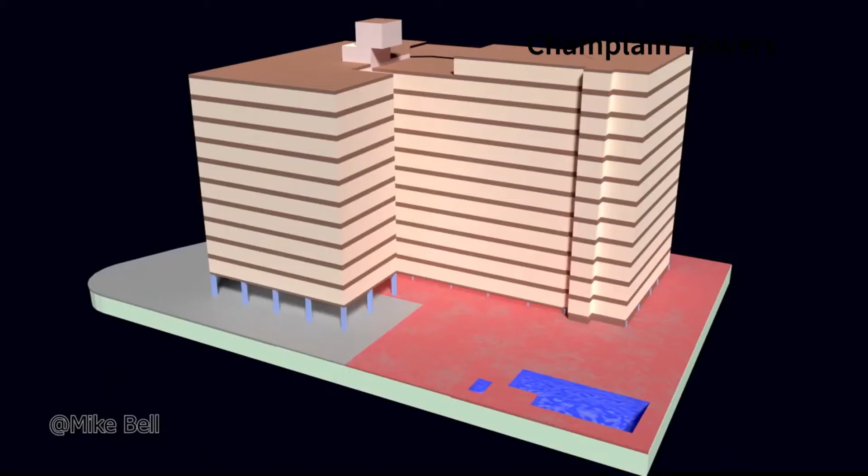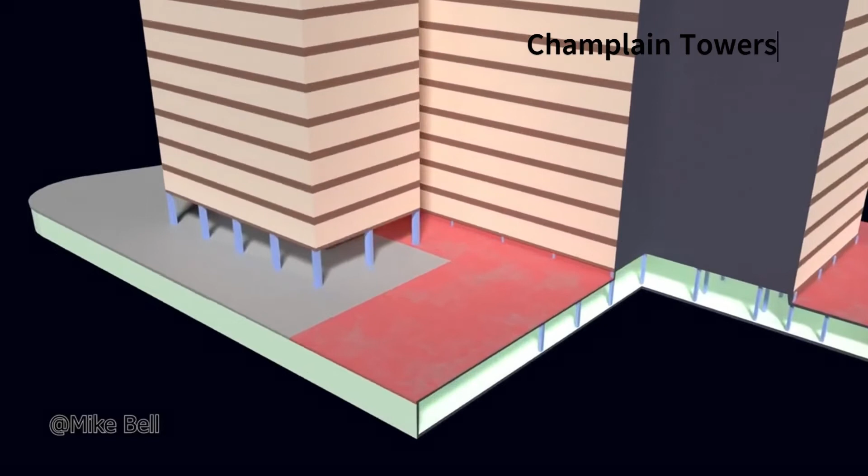According to a news report, in 2018, an engineering firm performed an inspection of the building and issued a report that noted that Champlain Tower's pool deck was flat and not sloped. Now, the question is, what happens if the pool deck is flat? Well, a sloped deck allows water to drain properly, whereas a flat deck can lead to water ponding. And water ponding leads to water seepage and damages the underlying concrete. Also, waterproofing below the pool deck was beyond its useful life.

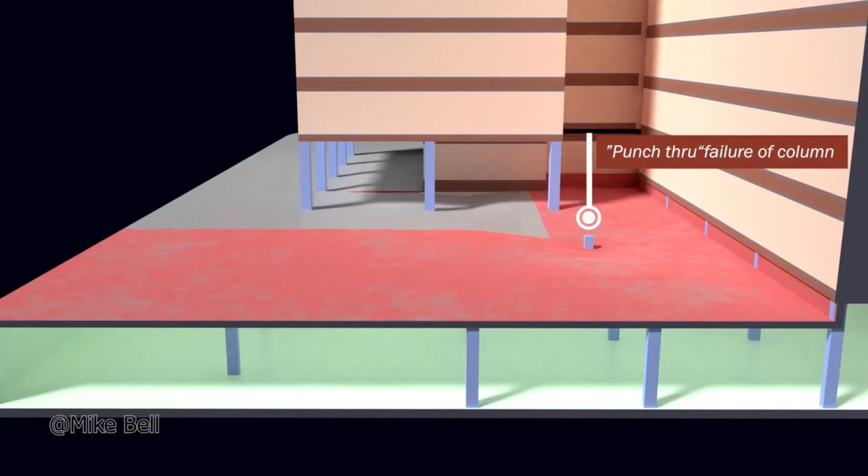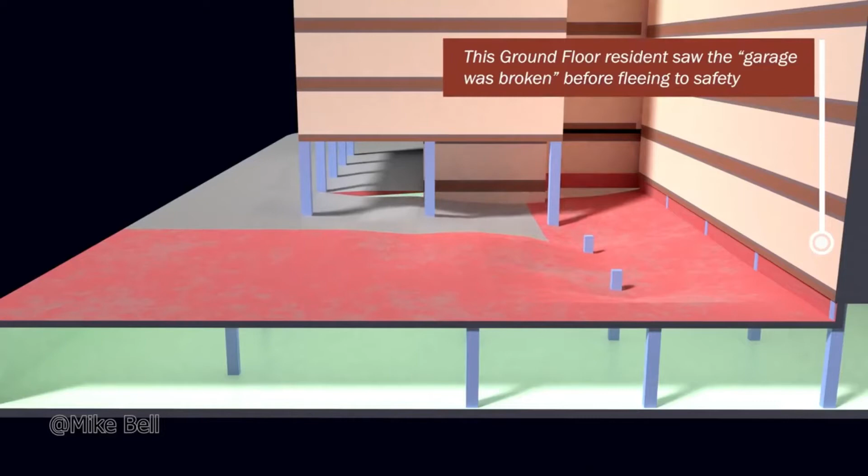So the building had major structural damage to the concrete slab below the pool deck, and there were signs of corrosion, spalling, cracking of the concrete columns and beams in the underground garage. Now, by the looks of it, you would guess the building actually survived the test of time many years and faced hurricanes like Irma, Wilma, Irene. But guess what? The Surfside building had design flaws, engineering flaws.

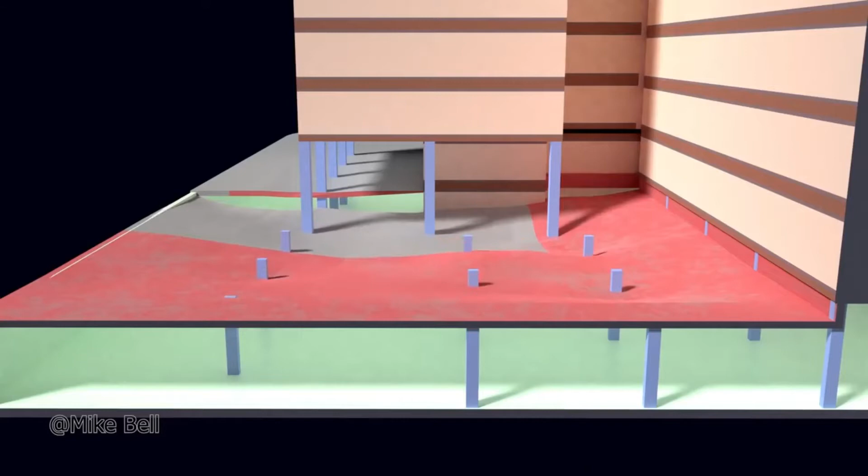Building plans specified structural columns that were too narrow to accommodate enough rebars, which also means the contractor had to choose between cramming extra steel into too small columns, which can create air pockets that lead to accelerated corrosion, or the other option was to develop a poor slab to column connection. Secondly, the columns were barely designed with enough strength to support a pool party. Coupled with standing water over time, this deck was overloaded for decades.

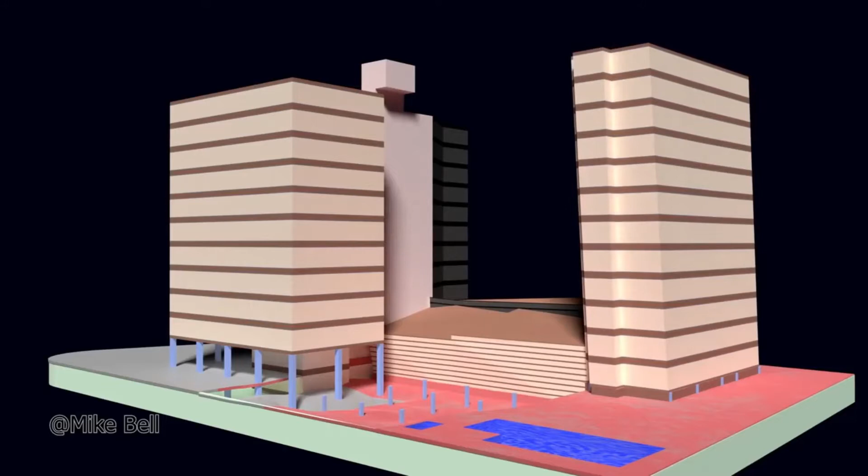Last but not the least, to make the situation worse, the condo association also delayed the repairs of the issues that were identified in the engineering reports because of infighting among the members of the association. Well, to fix these problems, ladies and gentlemen, the government came out with the SB 4D building safety law. Unfortunately, it took a tragedy like Surfside to pass this law.

110 yeas, 0 nays, Mr. Speaker. Bill passes. With a unanimous vote in the Florida House, this is real policy with real change affecting real families. Lawmakers like State Rep Jackie Toledo from Tampa say they're hoping to prevent another tragedy similar to the catastrophic condo collapse in Surfside last summer.

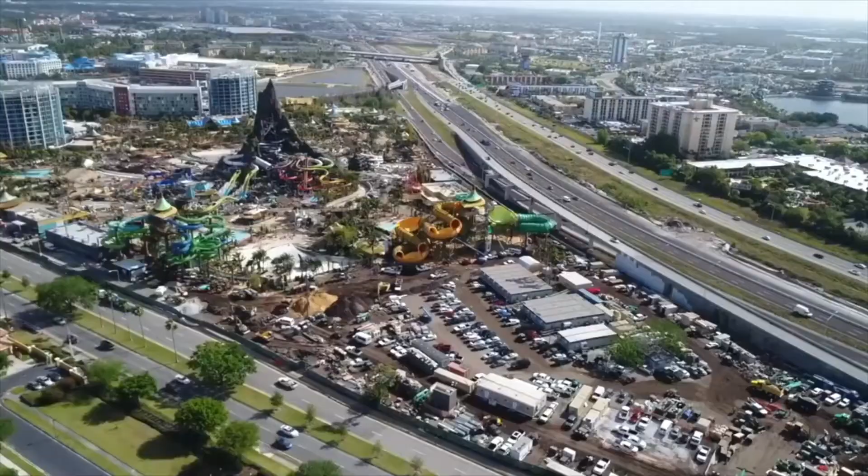So the question is, what is the SB 4D and how can it really fix all these problems? As usual, let's try to understand using a simple, relatable example. Let's say I live in Orlando in a 3-story or higher constructed building. The building is constructed prior to July 1st, 1992. Note that even today, most buildings still do a reserve study, but the structural element from the reserve study is still missing. That being said,

assuming I'm the board of directors of my condo association, it's my responsibility to hire a structural engineer to perform a visual inspection of my building that meets the SB 4D law requirements. This visual inspection is also known as the Phase 1 inspection. Now, I want you to know that if there is no substantial structural deterioration observed during the Phase 1, engineers will not trigger the Phase 2 inspection.

By the way, this is an oversimplified example where the building's location is in Orlando. In reality, if the building is within 3 miles of the coastline, the milestone inspection needs to be performed when the building is 25 years old and every 10 years thereafter. Further, repair works highlighted in the engineering report also need to begin within 365 days of when the report is submitted.

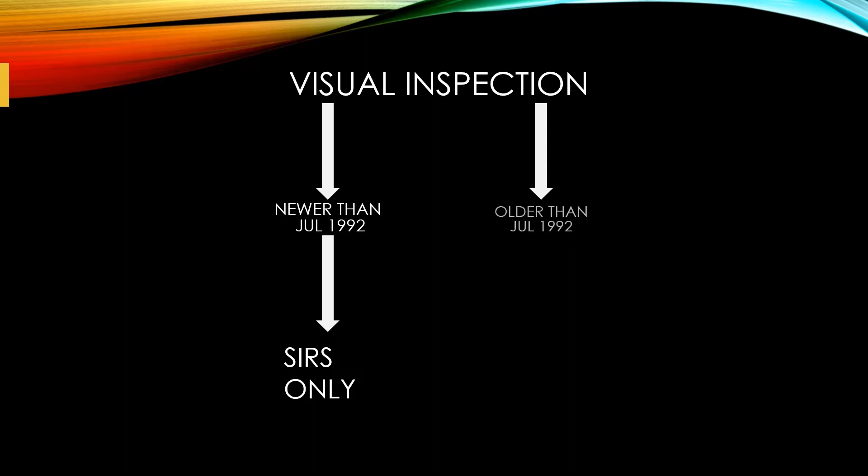Now, if my building is 30 years or older, I will hire an engineer for 2 studies, the milestone inspection and the visual inspection for the structural integrity reserve study. If my building is less than 30 years old, I would hire an engineer for the visual inspection for the structural integrity reserve study only. Now the question is, what kind of condos are required to do the structural integrity reserve study? Well, the answer is quite simple. All condo associations 3-story or higher existing before July 1st, 2022 are required to perform this study regardless of their age.

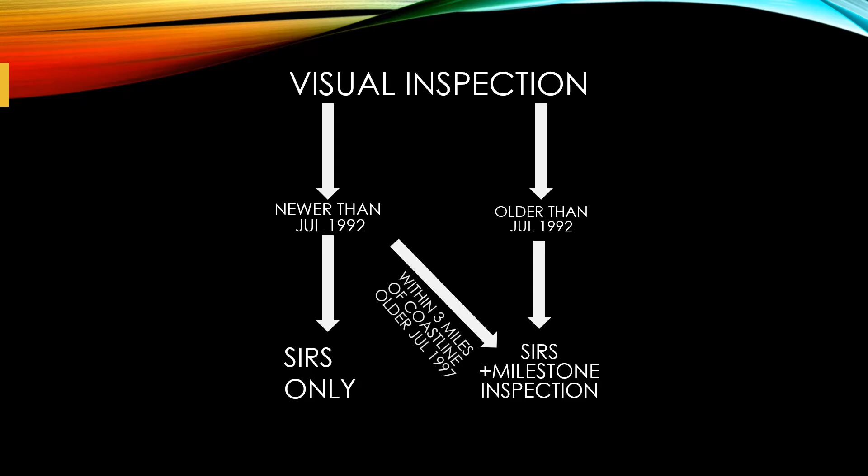Well, now the other question is, how is the structural integrity reserve study different from the milestone inspection? Well, they're not too different in a few aspects. However, the structural integrity reserve study is an even broader term than the milestone inspection. The condo associations are required to estimate and account for the dollar values of all the expenses that are more than $10,000.

Now, to estimate the dollar value, one must know the required repairs and the remaining useful life of the building components. That includes the roof, load-bearing walls, primary structural members, floor, foundation, along with fireproofing, fire protection systems, and plumbing. That's where the visual inspection by a licensed engineer comes in.

We at McCall Engineering are providing visual inspection for all the above items with the exception of plumbing, fire protection, and fireproofing. The fun part over here is, in spite of the fact that this SB4D building safety law is developed to give condo residents and the local building department a sense of peace of mind that the building they live in is safely maintained and structurally sound, unfortunately, this law seems to be becoming a nightmare for condo associations.

Now, the fun part here is a very similar law was passed in 2008 that required condo associations for maintenance, useful life, and replacement cost. The inspection must be performed. However, that law was repealed shortly after its enactment in 2010. The reason was it was too expensive.

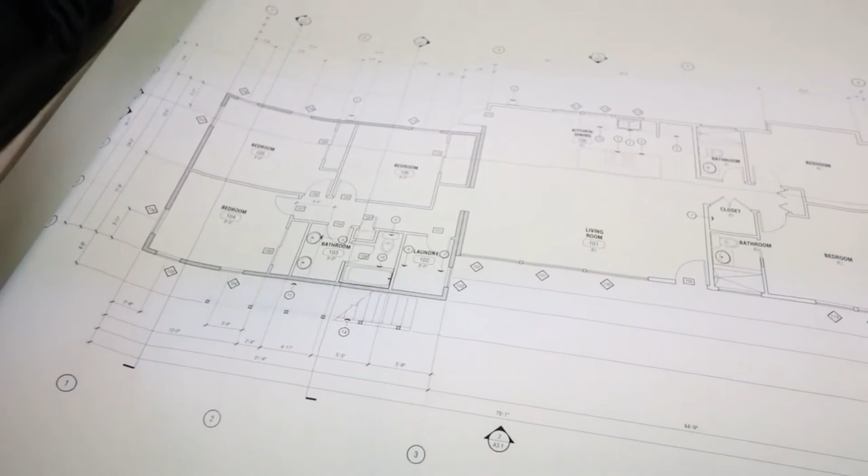Now, that brings me to the third part of my presentation, the cost you pay and the product you get. While we at McCall Engineering are shooting to get you an incredible product, while also educating you along the way about every step involved in the building safety law, I also want you to know that we are trying to keep the cost low for you.

Firstly, let's talk about the product. What happens when you sign the contract? The product is a visual inspection report that meets the requirements of the SB4D law. We will come out to perform a visual inspection, and we will fill out an attached visual inspection sheet for each condo and the common areas.

Now, what we would need from you during the inspection: we would need your structural plans and all the structural information to develop a continuous load path of the building. Once we establish the continuous load path, we will determine the members that are critical. If any of the critical load-bearing members show signs of substantial structural deterioration, we would need to trigger phase 2 evaluation.

Now, the second part is the cost. We charge $225 an hour. The estimate of the hours for a full-blown visual inspection is roughly 45 minutes times the number of units in your building. For those associations who have low reserves, we also have an alternate solution to help you as well. We may reduce the cost by about 40% through participation of the residents. For a more customized quotation, feel free to give us a call.